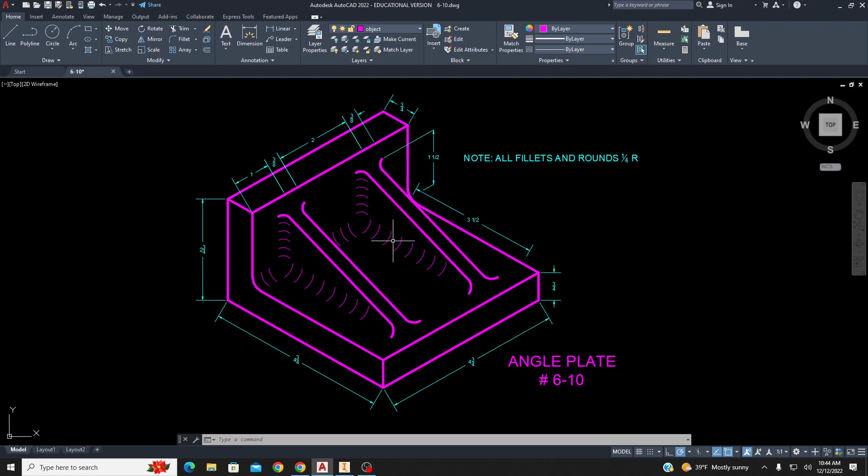Okay, so today we are going to be 3D modeling the angle plate in Autodesk Inventor Professional 2022.

In order to get started, let's take a look at our print here in AutoCAD. We've got basically an L-shaped plate that we would then extrude across its width, and then we have two ribs supporting it. Inside of all those ribs, we've got lots of fillets and rounds, which is why we have this note.

So in order to extrude our L shape, we're going to draw that. It's 2 3/4 tall by 4 3/4 wide, and the extrusion itself will be 4 3/4 wide as well. Our plate thickness here is 3/4 of an inch. So 2 3/4, 4 3/4, and then 3/4 of an inch, and it's the same up top as well.

So let's jump over to Inventor. Start our new part. Again, as always, we're going to open up our origin, make it visible. We'll press F6 so we can see what we're doing here.

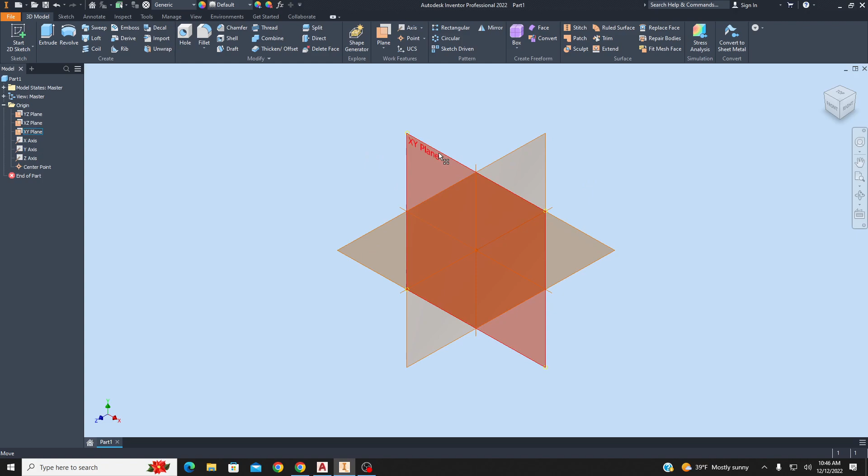Alright, so let's select our XY plane, and we'll start a new sketch there. Again, we're just drawing a basic L shape, nothing terribly critical about it, as long as we get our lines nice and vertical and horizontal. There we go, and then that, and we'll close in our shape.

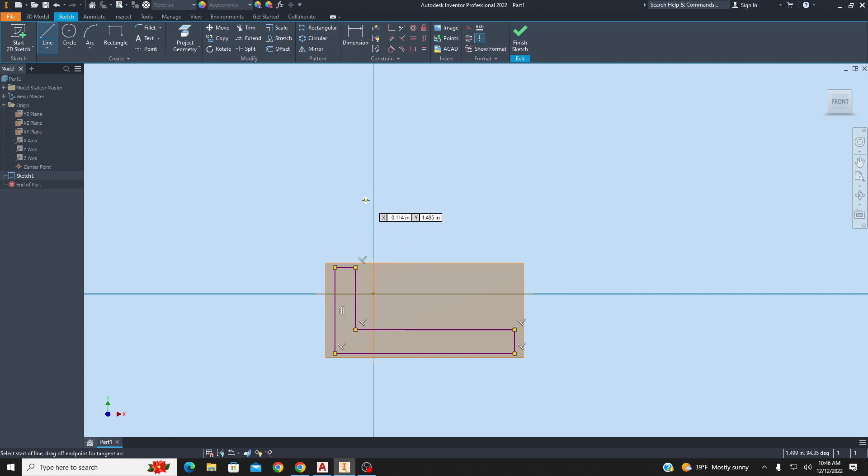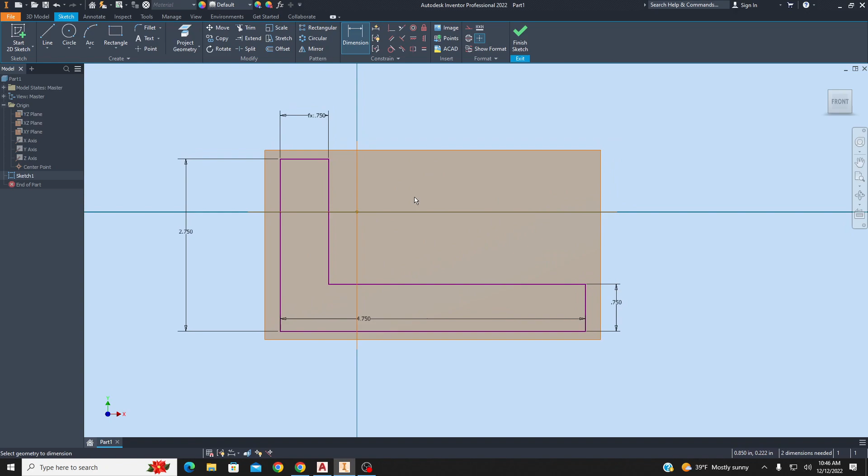Let's dimension this. So we said it was 2.75 there. This should be 4.75 here. And then our ends are going to be 3/4 of an inch as well, and we'll just reference that dimension so they stay identical no matter what we do. In terms of centering this up, it really doesn't matter. So we'll click Finish Sketch.

And then we'll do our extrusion here. Extrude that. We said 4 3/4. We're going to go in both directions. Make sure surface mode is off. So 4.75. There we go. Click OK.

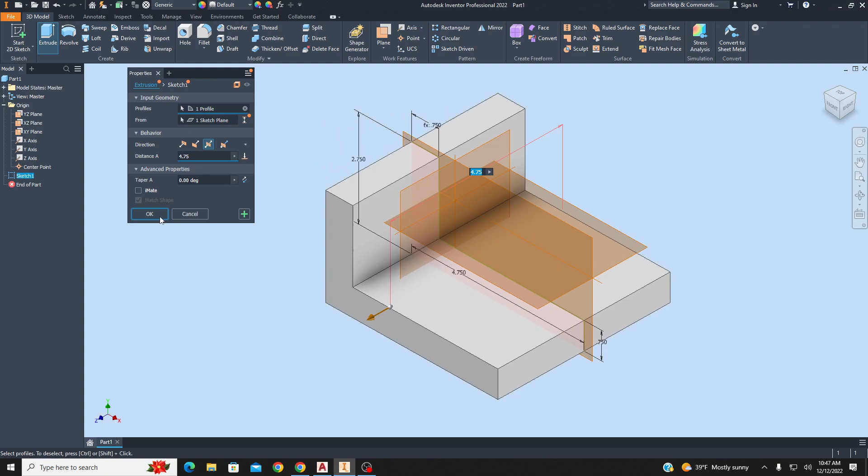Alright, so now we want to add in our ribs. Let's take a look at those ribs. We'll do all the fillets at the end. So those ribs are 3/8 of an inch wide based on our dimension chain up here.

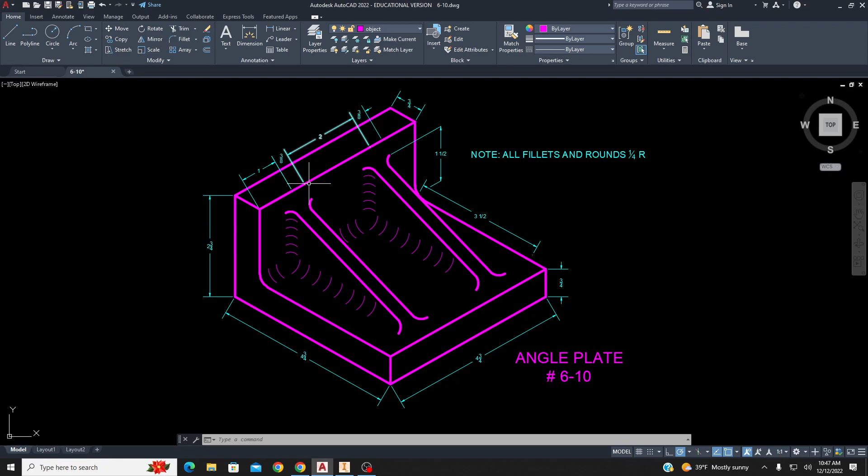And they're 1 inch in from the end of each of these. And also, if we were to draw an imaginary center line down the middle here, they're also 1 inch from the center. So if I were to take a plane from the middle and move it over 1 inch, then I would be right at the edge of one of our ribs. So that's exactly what we're going to do here.

So we have this plane. We can duplicate it using a process called creating a work plane. So that's what the plane tool does. If we click down, we see we've got some options here for generating a work plane. I like offset from plane, so we'll click that. So we'll select our source plane here.

We're just going to drag it some distance, doesn't matter. Then we can edit our number. We're going to tell it that it's 1, and we'll click OK. So our rib is going to exist on the kind of the lower left side of work plane 1 now that we just created that.

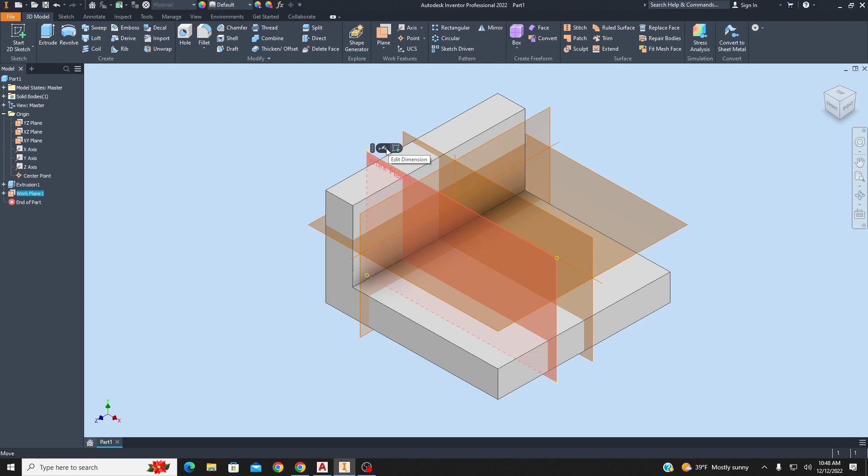So we'll click on work plane 1, and we could adjust the dimension if we made a mistake, or we can create a sketch. So we're going to create a sketch. Now we need to be able to reference this vertical edge and this horizontal edge, so in order to do that, we're going to use project geometry.

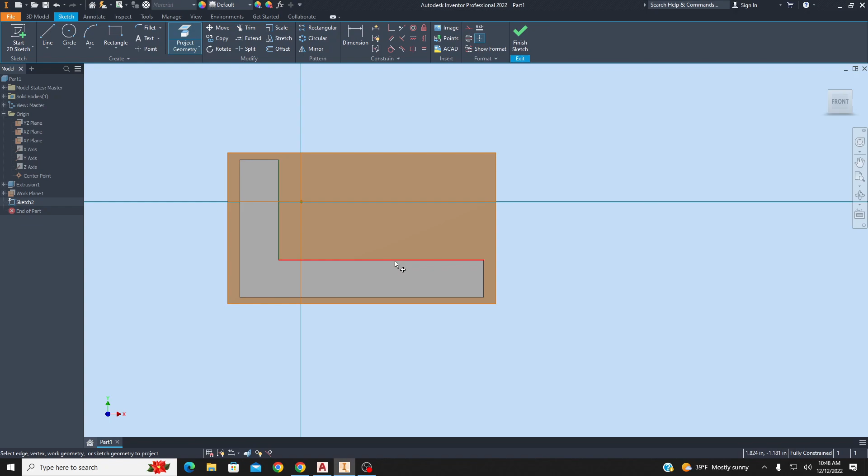So we'll click that, and what that does is apply edges to our drawing that normally don't touch it. We'll click on those two edges, and it turns them into lines on our drawing. We can see they're now a darker green color - they might be different on your drawing, usually in standard view mode they're yellow. Alright, we're done with project geometry, so we'll hit escape.

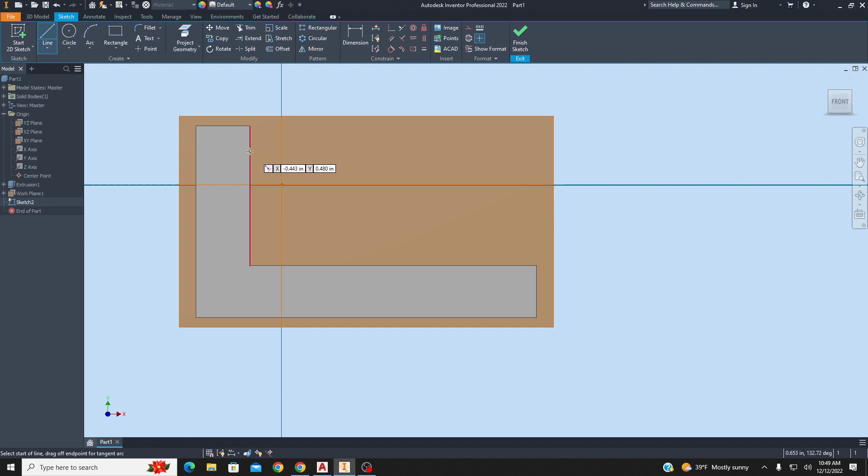Now we can just draw a line. We're going to draw our rib here, so just connect up. I like to personally also go in and just connect with lines again. Technically we're probably drawing over top of our lines, but it's not going to hurt.

Our ribs are measured from this corner, and they are 1.5 inches tall by 3.5 inches wide, so we'll put in those dimensions. From that point to this edge is 3.5, and from this point to this edge is 1.5.

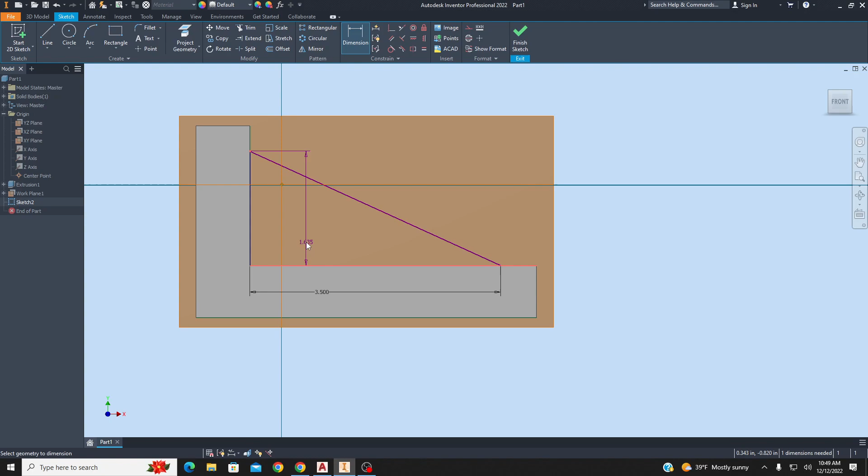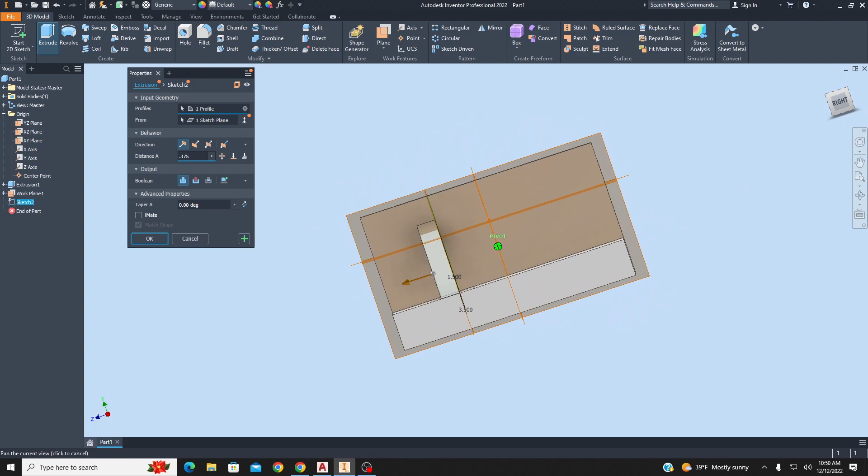Then we can hit finish sketch, and we'll extrude that. Now this one is going to matter what side of the plane we're on - that's probably one of the first times this has mattered so much. Our ribs are 0.375 wide, 3/8 of an inch, and we want to make sure we're going, in this orientation, to the left of our work plane, which if we use our view cube here, we can see that's exactly what we're doing.

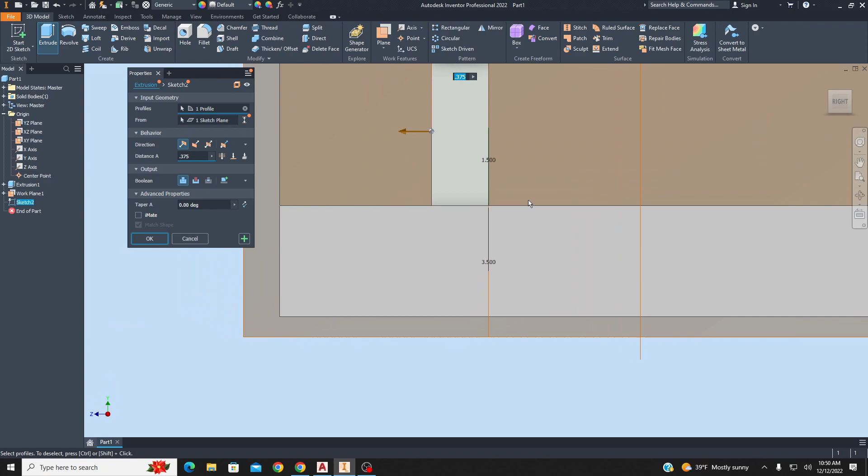So remember, we wanted 1 inch plus 3/8, and then should be another 1 inch left over here. So if we actually look between here and here, it's approximately the same distance - it definitely is based on the numbers we've input. So we'll click OK and accept that.

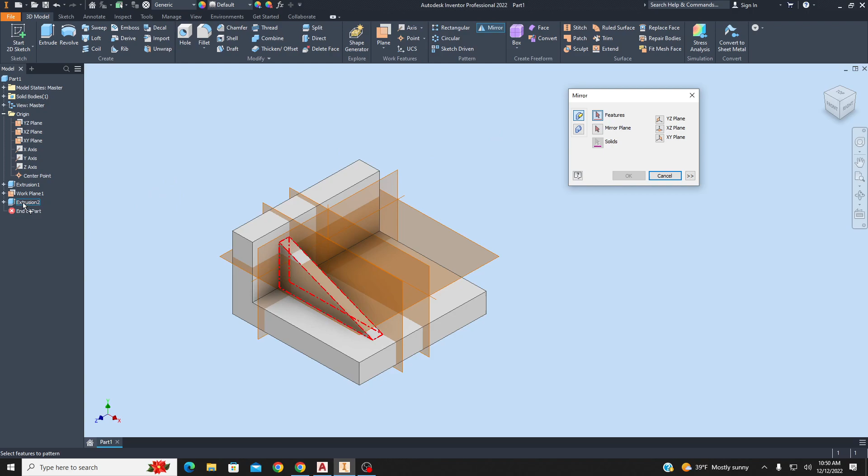Now, I could repeat that whole process, or there's a feature called mirror in our 3D modeling section. If we click mirror, it asks what feature do we want to mirror. I can go over to my browser and select extrusion 2. Then it says mirror plane, so we want to use our plane that's in the dead center of our part. You can see it's previewing.

If we want to click on right, we can make sure things look nice and symmetrical. It looks good to me. And then we'll click OK, and now we've created our second rib.

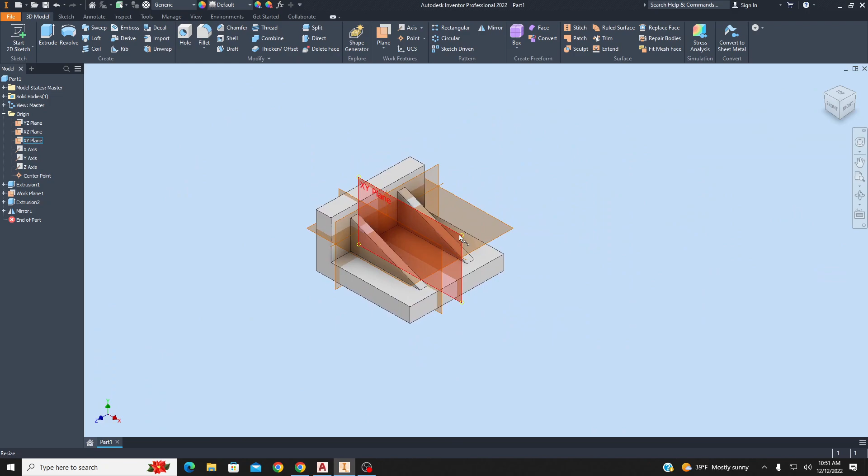So now all we have to do is go in with our fillet tool and fillet everything. We said all fillets and rounds are 1/4 of an inch, so we'll click on fillet and make sure it's set to 0.25. Just go through and we'll start filleting all of our pieces.

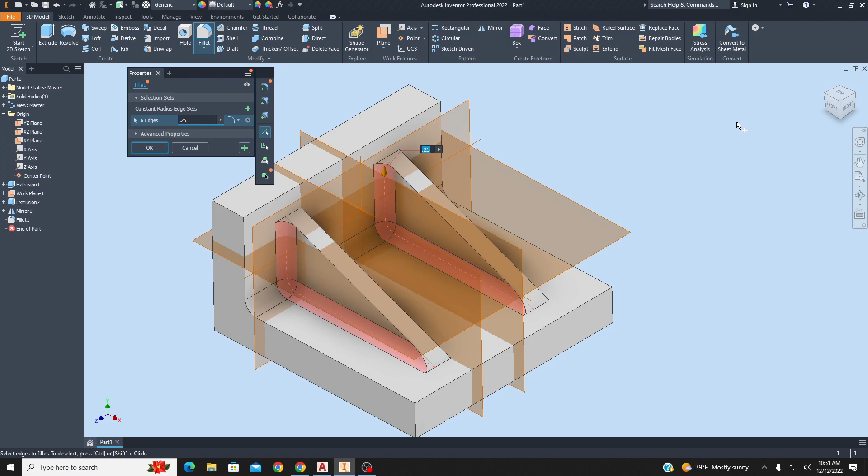I like to actually do 2 separate fillets - I like to do this back fillet first, then we'll click apply or OK. We'll go back through with the same setting, and we'll do the sides of our ribs as well. Go over here, we'll do that side. The reason why is it's actually less to click because it now turned each edge into one continuous edge since we rounded it off, so it's a few less clicks that way.

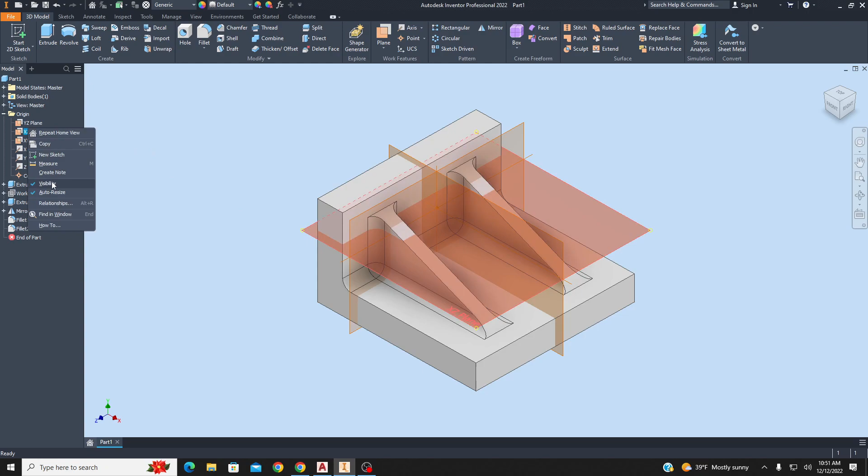So we'll press F6, and that is the angle plate. If we ever wanted to make work plane 1 not visible, I could always right click on it and uncheck visibility, and that goes away. Let's make this plane not visible as well, just a little bit easier to see what we've got going on here. Alright, that is the angle plate.